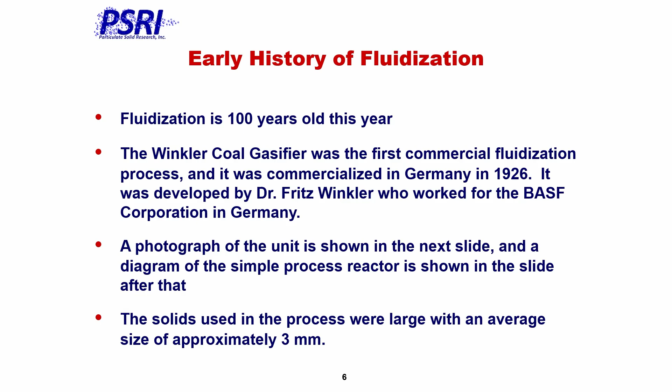The solids used in the process were large, with an average size of approximately 3 millimeters. And as we're going to see, even in the US and in Europe, people were using very large particles, Geldart group B and D, when they first looked at fluidized beds. It wasn't until we got to small particles that people really started to develop the FCC process.

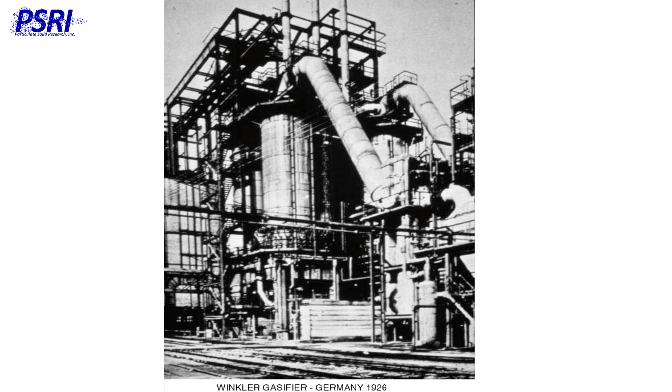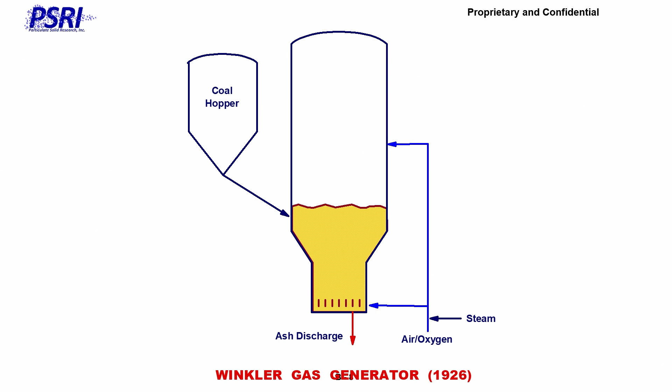Here's a picture of the Winkler gasifier. You see it was a going concern, a big unit here. And this is basically the gas generator, a diagram of what it has. They brought in the coal here. They really didn't have a proper distributor, it was more like a grate that they had here. They would bring in the oxygen and air and oxygen steam here as well. So it was a very simple device, but it was the first commercial fluidized bed.

As I said before, fluidization was being explored in both the US and Europe in the 1920s using the Geldart group B and D particles. I'll talk about Geldart groups B and D in a little bit, and most of you people already know about that. Research was conducted in the US, basically by the US Bureau of Mines in the 1920s, and also in Europe in the 1920s, especially with BASF, headed by Dr. Fritz Winkler.

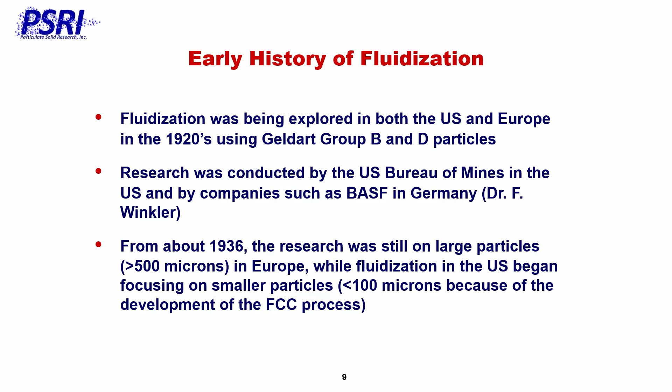From about 1936 until later, the research was still on large particles, greater than 500 microns, in Europe. Fluidization in the US at this time began focusing on smaller particles, less than 100 microns, basically because of the development of the FCC process. And it was sort of an accident, as we're going to see, why we went into the smaller particles. So the history of the development of fluidization basically parallels the development of the FCC process.

So it is the reason why we have this large fluidization community today. It's sort of the grandfather of all fluidization processes. So this process was important.

Whoops, I'm sorry. Let me go back here. I hope I go back.

This process was important in producing high-octane aviation gasoline and Buta-S rubber in World War II. The government was plowing all sorts of money into development of these processes. So it developed very quickly. It couldn't be done in the same time frame today, but anyway that's what they did. So there was a lot of money given to these companies and a lot of pressure put on to develop this process.

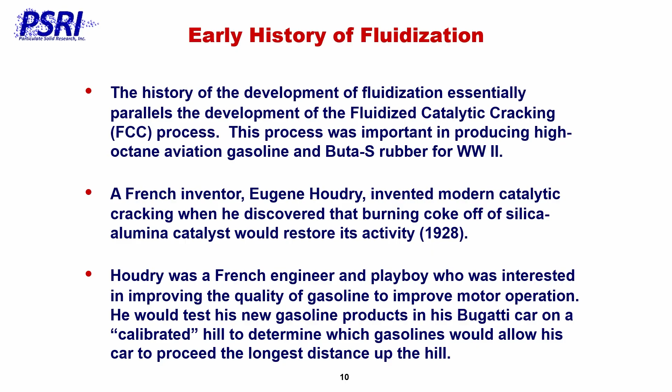Houdry was a French engineer and playboy, basically what in French they call a raconteur, something like that. He was really interested in improving the quality of gasoline to improve motor operation. So what he had was a Bugatti car, and he would test his new gasoline products in this car on a calibrated hill. The best gasoline products would get the car further up the hill and that sort of thing. Anyway, he was an interesting guy.

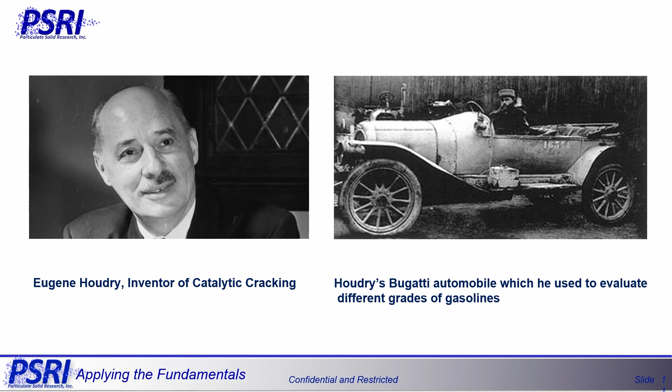So this is a picture of Houdry, and this is a picture of the car that he used to calibrate and test out the different grades of gasoline that he would produce.

So Houdry developed this process and had patents, and people were using this process to produce gasoline. Houdry's patents were adopted by Sun Oil Company and Socony Vacuum, which later became Mobil, to produce the first commercial catalytic cracking unit. It was a packed bed in 1936 with big particles, roughly about 3,000 microns or so. They weren't the 70 micron particles that you have today.

After a while, other oil companies had to pay a license fee to Houdry, and some of them felt that Houdry's licensing fees were excessive. So Standard Oil of New Jersey, called Jersey at that time, now Exxon, was a leader in forming an 8-company Catalyst Research Association to develop a catalytic cracking process outside of Houdry's patents.

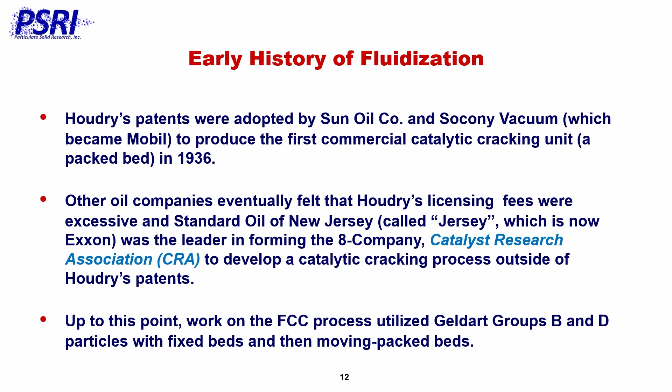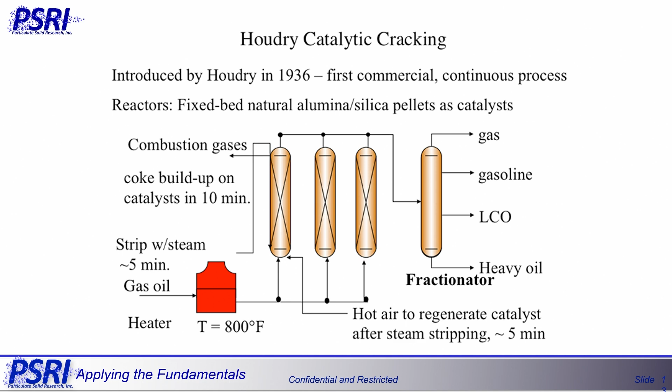Up to this point, work on the FCC process utilized Geldart groups B and D particles with fixed beds and moving packed beds. This is basically Houdry's process. He had 3 fixed beds, with different things going on in each particular bed. In one, he had hot air to regenerate the catalyst after steam stripping, and so on. So he had different parts of these fixed beds, and they would move the gases around in that particular type of approach.

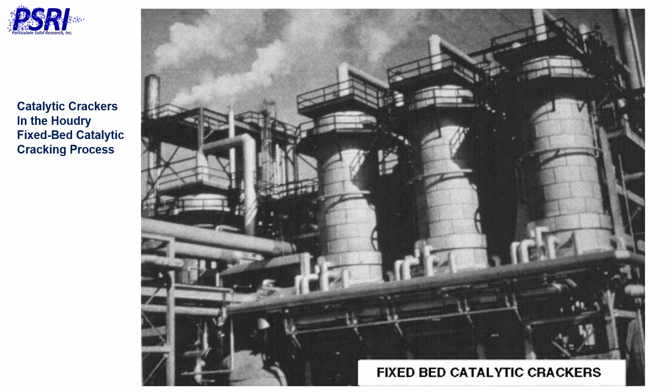So this is a picture of these 3 beds of the Houdry process, basically around 1936, 1937 or so. But in 1934, before the formation of the Catalyst Research Association, it was discovered accidentally at Imperial Oil...

...that a small Geldart Group A powdered catalyst could rapidly and catalytically crack oil. After some time, the CRA used this discovery to develop their cracking process using fine particles. So that's really why we started to use fine particles with FCC. At this time, the U.S. then began diverging from using large particles. However, large particle work on fluidization persisted in Europe for several more years.

So early FCC units using fine particles employed horizontal tubes or coils. It wasn't a vertical fluidized bed like we have today. And they were having a lot of trouble with these horizontal tubes and coils because of plugging of the reactor.

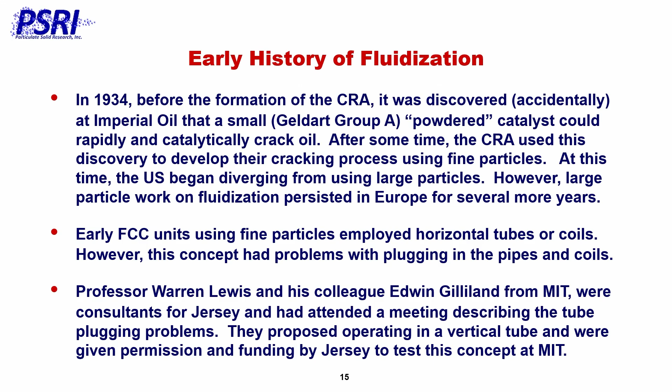So Professor Warren Lewis and his colleague Gilliland from MIT, very famous figures in the field of fluidization, were consultants for Jersey. They attended a meeting where they were talking about the plugging of the pipes and coils. They proposed operating in a vertical tube and were given permission and funding by Jersey to test this concept at MIT. The tests at MIT were very successful, and eventually this vertical fluidization concept was adopted by Jersey and the CRA.

Interestingly, Lewis and Gilliland said that they were not aware of the vertical fluidized bed used by Winkler in Germany. They may not have been, but Jersey certainly was.

Jersey said that they were aware of this Winkler work, but claimed that it didn't influence the development of their process, because the Winkler was a large particle process.

The first modern FCC process began operating in Baton Rouge, Louisiana, on May 25th, 1942, with the Jersey Exxon Model 1 unit. The original name of the process was Powdered Experimental Catalyst Louisiana, shortened to PECLA. The Jersey Exxon Model 2 was started in 1944.

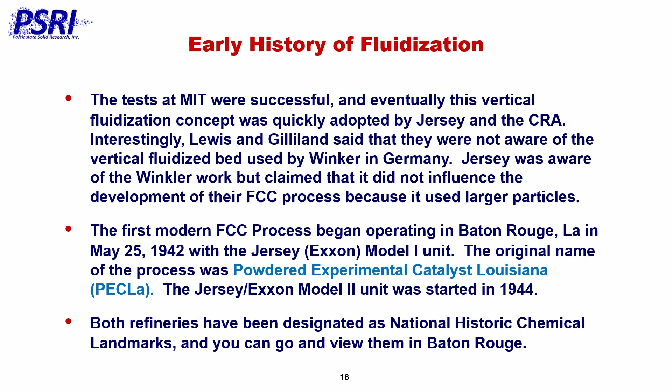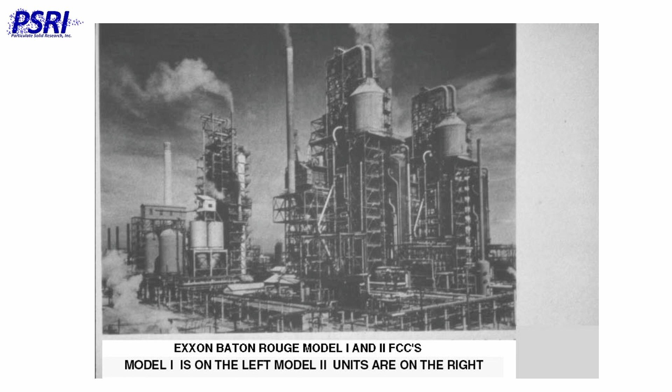Both refineries have been designated as National Historic Chemical Landmarks, and you can actually go see them in Baton Rouge. Here's a picture of the Exxon Baton Rouge Model 1, and the Model 2 FCCs are here on the right. You can actually go and see these units.

Because of these developments, FCC has been called the grandfather of the fluidization field, and it's rightly so, because almost all the work done early on in fluidization was done in association with the FCC.

It got this impetus from World War II, as I said before, to develop high-octane aviation gasoline and butylenes to develop Buna-S rubber and high-octane gasoline. So the development of the FCC process was really a very large factor in influencing the outcome of the war.

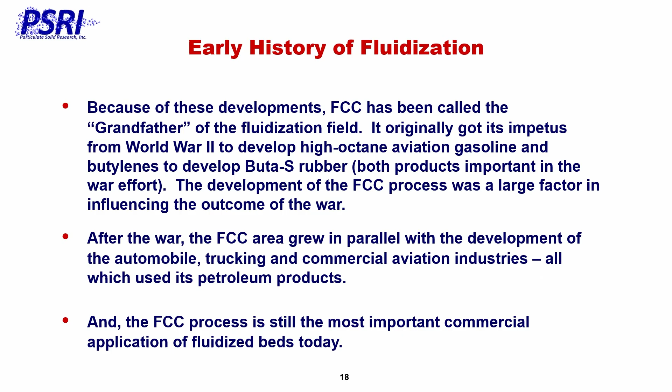After the war, the FCC area grew in parallel with the development of the automobile, trucking, and commercial aviation industries, all of which used its petroleum products. Even today, the FCC process is still the most important commercial application of fluidized beds.

After World War II, developments in fluidization proceeded very rapidly. Fluidized beds were used in the production of phthalic anhydride, acrylonitrile, the Fischer-Tropsch process, and were also extended to drying of materials. This happened in the late 40s and early 50s.

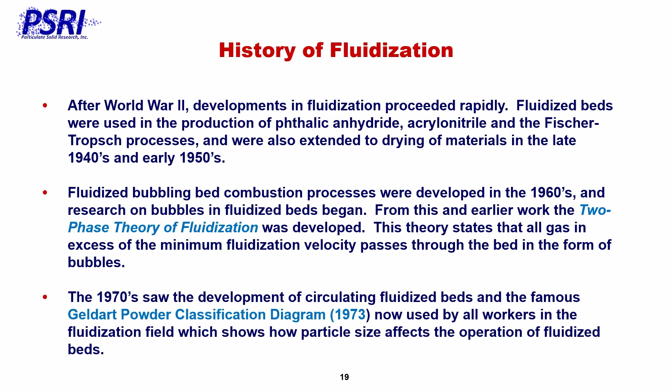The fluidized bed bubbling combustion processes were developed in the 60s. Then people said, well, we've got this fluidization concept, it has bubbles in it, maybe we should study bubbles. So they started to research bubbles and how they affected these fluidized beds.

From this and earlier work, the two-phase theory of fluidization was developed. This theory states that all gas in excess of the minimum fluidization velocity passes through the bed in the form of bubbles. So if you have a high velocity in your bed, almost all the gas is going through the bed as bubbles.

The 70s saw the development of circulating fluidized beds, which is basically what an FCC riser is, a circulating fluidized bed. Circulating fluidized bed combustors are the main proponents of this technology.

The famous Geldart powder classification diagram was developed in 1973, and it's now used by all workers in the fluidization field, showing how particle size affects the operation of fluidized beds. I'll show you on the next slide. It's the most famous paper in fluidization.

It was little known, however, that when Derek Geldart submitted his paper to be published, it was rejected the first time. I was a good friend of Derek, and he was a little miffed about this. He said it probably didn't have enough partial differential equations in the paper, because it was a very simple paper. But it basically revolutionized how people look at particles in the fluidization field.

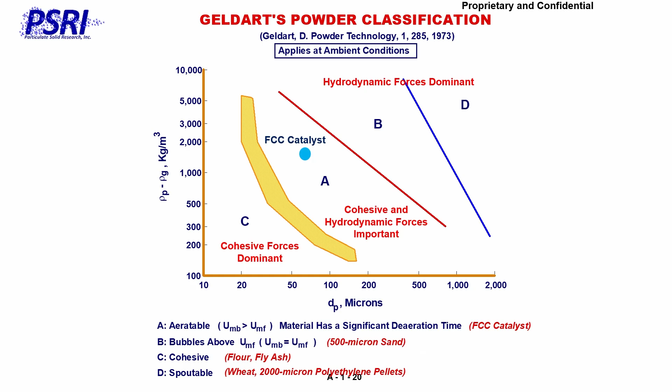Now, you guys are probably all too young to remember this, but the embargo of the Organization of Petroleum Exporting Countries, OPEC, against the U.S. in 1973 led to shortages of natural gas and petroleum. People who lived at this time will remember the rationing of gasoline and long lines of people waiting to fill their automobiles.

For instance, if your license plate ended in an even number, you could get gasoline on a Monday, and if it ended in an odd number, you could go get gasoline on Tuesday. That's how they did this sort of thing. Because of these shortages, the U.S. government said, I want to not be caught like this again—I want to be able to produce more energy.

So they increased funding for several coal gasification plants to produce syngas to mitigate these future oil shocks. These coal gasification processes were operating at very high pressure, say 1,000 psi-G or 70 bar, and high temperature, 1800 F or 1,000 degrees C. They didn't have much information on fluidization in this area, so the lack of information at high pressure and temperature led to significant research during this time.

Nearly all of these processes utilized Geldart Group B solids as well. And that's where I got my first baptism into fluidized beds, because of this particular area in the 70s when IGT, that I worked for at the time, was developing coal gasifiers.

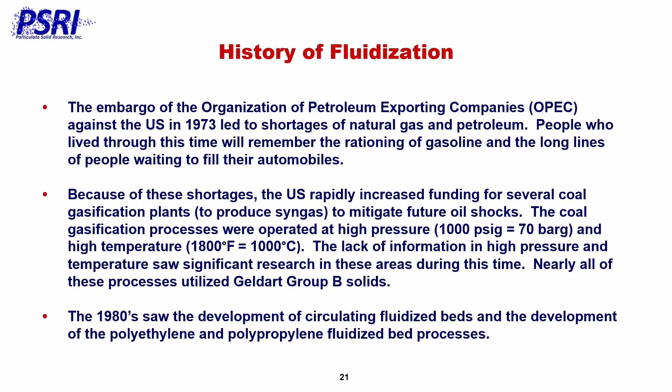The 80s saw the development of circulating fluidized beds and the development of polyethylene and polypropylene fluidization processes. In the 90s and the 2000s, and still to this day, there became an intense focus on process scale-up, system analysis, and the development of simulation tools, such as CPFD software is having today. This time also saw the early application of computational fluid dynamics and their models to fluidized beds, and the start of research into very fine cohesive particle fluidization.

This stuff is very hard to fluidize, cohesive particles, because of interparticle forces like flour. But it has such a high surface area to unit volume that people would really like to use this in a fluidized bed if they could, because it's going to be so reactive. So the improvement and focus on modeling fluidization and the work on fine cohesive particles are areas that will be important still in the future, and I'll talk a little more about that. The other major change over this time was the rapid rise of China in the fluidization field.

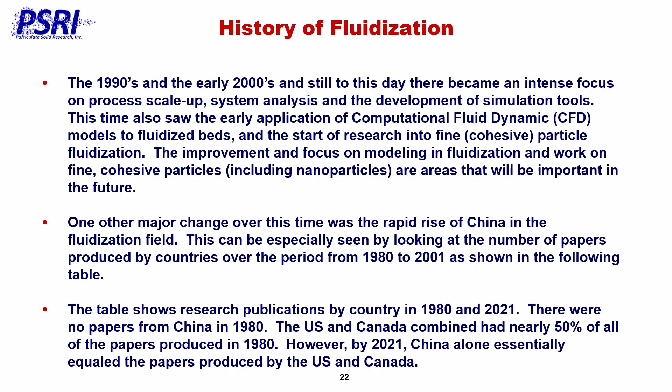This can be seen by looking at the number of papers produced by countries over the period from 1980 to 2021, shown in the following table. There were no papers from China in the top 10 in 1980, but by 2021 it was the leading country producing fluidization papers.

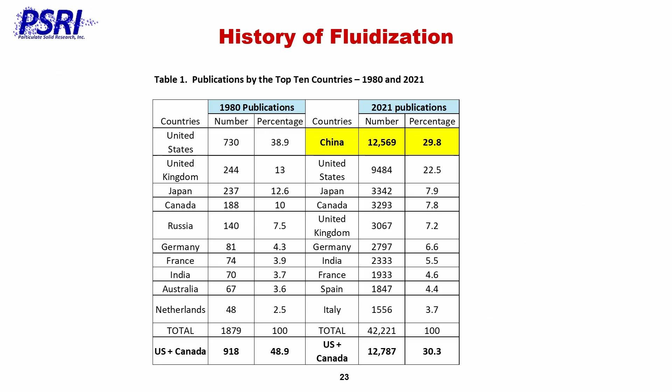In 1980, the United States had the largest percentage of papers in fluidization, and if you add US and Canada, it was about 50%. Now in 2021, China had the largest percentage of publications at about 30%, roughly equal to the sum of US and Canada. So in that period, China really took over the fluidization field, and the number of people working in it even today is dominated by China.

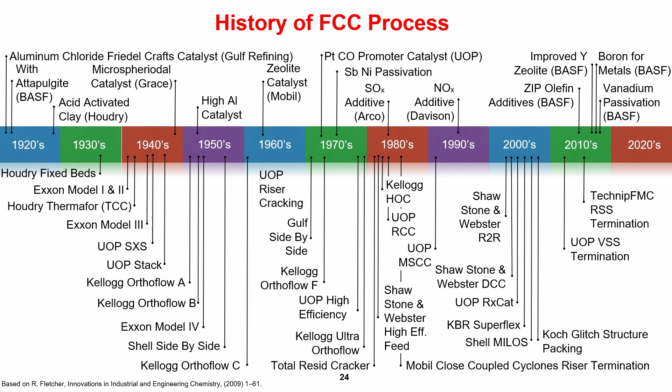This is just a plot for people who want to look at it, a history of the FCC process. We started with the Houdry fixed beds, then the Exxon Model 1 and 2. You can see a lot of things that were developed like UOP riser cracking, et cetera. This is a slide to look at significant developments in the FCC field.

I'd like to talk now about regimes in fluidization. There are different regimes depending on the velocity in your fluidized bed. I've done this for a Group A material. First you have a packed bed, where you don't have enough drag force to support all the particles and cause fluidization. Then for a Group A material, just barely above fluidization, you have the particulate regime where it's fluidized but you have no bubbles.

Then you start to form bubbles into the bed, a typical bubbling bed. In a research lab, if these bubbles get to be about half the size of the column, you have what's called slugging, with severe fluctuations in the bed, something you want to stay away from. Fortunately, in commercial systems the units are so large you don't have to worry about slugging. Maybe in pharmaceuticals with smaller diameter beds, but with big beds you won't get slugging because the bubbles don't get to be half the size of, say, a 50-foot diameter vessel.

Once you get to bubbling beds and increase the gas velocity, you get into a turbulent bed. Turbulent beds don't really have any stable bubbles, but they have voids that break very quickly, so you get high rates of heat and mass transfer. That's really where almost all FCC regenerators lie.

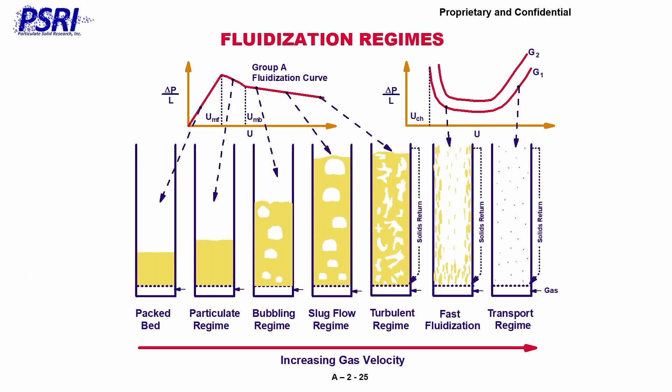Between what we call a choking velocity, which separates the dilute phase from the dense phase, and this point, this is called the fast fluidization regime. That's where the FCC risers operate—it's the densest part of the dilute phase pneumatic conveying regime. So for many years people looked at these regimes, and we really know what happens now.

There was a huge argument in the 70s and 80s about where the fast fluidization regime was. Some people said it's here, some people said it's here. Now we know basically it's right here.

Fluidized beds have been spectacularly successful as devices to produce industrial products over the last 100 years, especially in the chemical and petrochemical industries. The characteristic advantages of fluidized beds that make them such widely accepted and highly efficient devices are listed below.

First of all, they have excellent heat and mass transfer. For heat transfer, it's an order of magnitude, 8 to 10 times what the heat transfer would be in a packed bed.

Also, you have precise temperature control. The rapid solids mixing in these beds results in nearly isothermal conditions, with temperatures throughout the bed within 2 to 5 degrees C. That's one of the best diagnostic tools you have in your fluidized bed—looking at the temperature distribution across the bed. If it exceeds more than 10 degrees C, you should start to worry about whether that bed is operating correctly. It also has a small footprint.

Due to the excellent gas-solids contacting and mixing, fluid beds require smaller reactor volumes to achieve the same throughputs as other technologies. And then it has fuel and material flexibility—fluid beds can accommodate a wide range of particle sizes and use combinations of different materials.

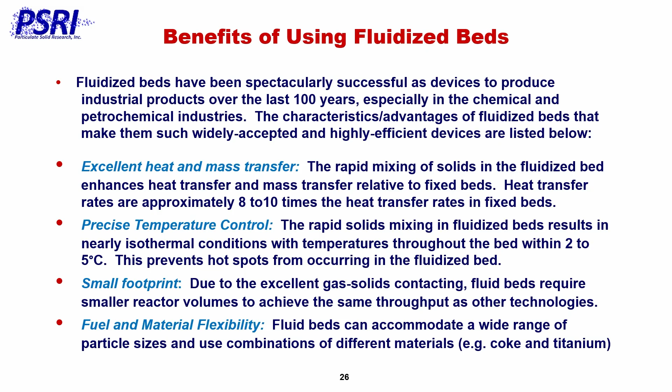For a chlorinator, where they have coke and titanium ore, the titanium ore is 150 microns, the coke is 1,000 microns, but you have to fluidize both at the same time, and they do it very successfully at about 800 to 1,000 degrees C. People are very creative, and they've been able to apply this field to all sorts of different types of processing.

Today the fluidization field is at a stage of knowledge development that is significantly greater than it was even 20 years ago. Now you have diagnostic techniques that have been developed that allow the determination of gas and solids mixing. You have mathematical models that are at a helpful stage of development now, and I'll say a little bit more about that.

The scale-up of fluidized beds is still an issue, taking time and money, but there's less variability in scaling up and more understanding of how to proceed with it now than there were 20 years ago.

The knowledge of fluidization regimes and how each regime should be used with each type of reaction and particle size is now pretty well understood. But what is not known definitively is how to predict interparticle forces and behavior of cohesive particles. That's extremely, extremely difficult. This is an area that will be studied more extensively in the future.

Probably if I were a young engineer going into this field, I would gravitate to that area because there's going to be a lot of work in this area.

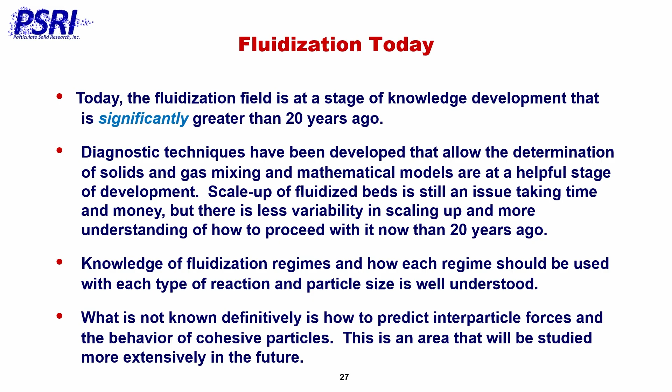Today there are extensive techniques that have been developed and perfected over the years that can be used to evaluate what is occurring in the laboratory, and some can be applied to hot fluidized beds. I'm going to list just a few of these things. First of all, there are optical probes, and they've been around for quite a while.

These use optical fibers to transmit laser light into the bed and then detect backscatter. The probes can determine bubble properties and particle concentration in the bed.

Then you have gas tracers, generally using helium, or maybe CO2, or other gases like sulfur hexafluoride. Using thermal conductivity detectors, you can determine the degree of gas backmixing and the amount and direction of gas flow.

Then you have fluorescent-coated solid tracer probes. The motion and concentration of solids dyed with fluorescent coating can be determined with probes, so you can determine mixing and how fast the mixing occurs in the bed.

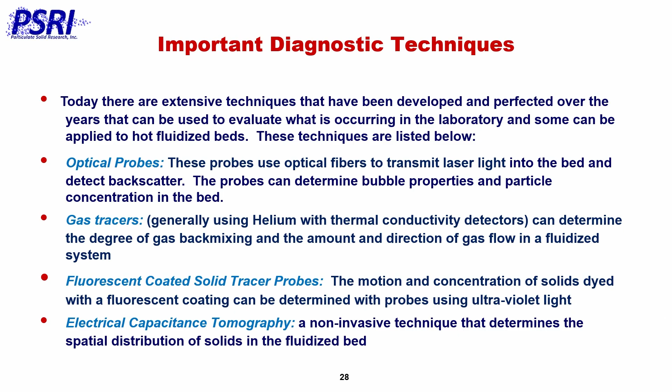And then you have electrical capacitance tomography, a non-invasive technique that determines the spatial distribution of solids in the bed.

And then there's high-frequency differential pressure probes, which we use a lot at PSRI. The fluidized bed behavior can be related to measuring the standard deviation of bed differential pressure drop fluctuations. The normal frequency of a fluidized bed is somewhere between 2 to 5 hertz, so you need something an order of magnitude greater than this—say 25, 50, or about 100 hertz—and you can see what happens in the bed, which gives you a lot of information.

Then you can have an extraction probe, a tube placed in the bed, a dilute phase line, to measure the mass flux distribution across the line because it's a movable probe. And then positron emission particle tracking, which is called PEPT.

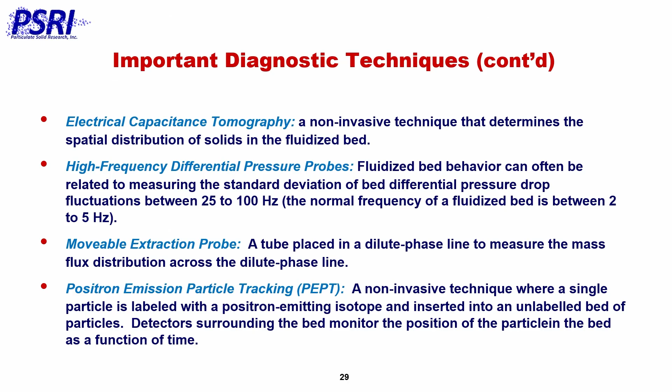It's really a very powerful tool, but it can't be used in large units. It's a non-invasive technique where a single particle is labeled with a positron emitting isotope, inserted into an unlabeled bed of particles, and detectors surrounding the bed monitor the position of the particle as a function of time. So you operate this over several minutes, and you can see where the particles have gone, how it mixes, and that sort of thing in the bed.

So there are hundreds of fluidized bed processes that exist today. However, there are several that are deemed important either due to their size or the relative importance of the area, so I'm going to talk about some of these. It's certainly not an exhaustive or all-inclusive list, but FCC, okay?

This process is still the oldest and most important application of beds today. This process converts crude oil into gasoline, diesel fuel, jet fuel, LPG, propylene, etc. Then there's the synthesis of polyethylene and polypropylene.

The fluidized bed for this particular process allows really effective heat removal and precise temperature control to prevent the melting of the resin. So they operate within about 5 degrees C of the melting point, something like that.

Then there's fluidized bed combustion, the CFBC, where you have a circulating bed that burns, say, coal, biomass, whatever fuels, in a suspended dilute phase mixture of ash and limestone for power generation. It captures sulfur and reduces NOx.

Very large units. For instance, these big units, a lot of them are in Poland and China. They're rectangular in nature, and the long length of the bed would be longer than the length of this room. The width would be maybe half to two-thirds the length of this room, and they're 200 feet tall.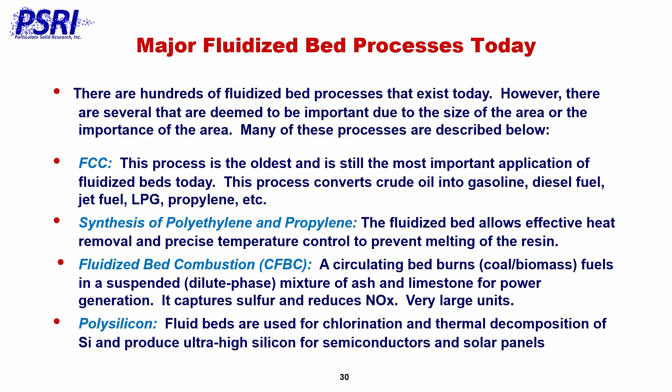Then you have polysilicon, and fluid beds are used for chlorination and thermal decomposition of silicon, producing ultra-high purity silicon for semiconductors and solar panels.

Then you have biomass and waste gasification. Fluid beds are used to convert municipal solid waste and biomass to syngas. Roasting of sulfide ores, where you take copper, gold, and zinc sulfides, roasted to extract metal oxide, producing SO2, mainly for sulfuric acid production.

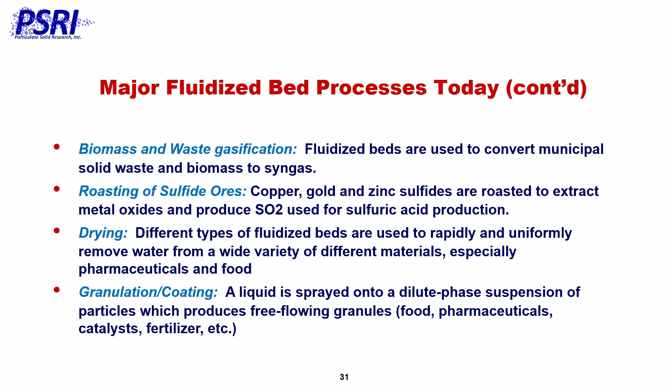And then drying—you have all sorts of fluidized beds, different types for different materials, used to rapidly and uniformly remove water from a wide variety of materials, especially in pharmaceuticals and food. Then you have granulation and coating, where a liquid is sprayed onto a dilute phase suspension of particles, producing free-flowing granules for food, pharmaceuticals, catalysts, fertilizer, etc.

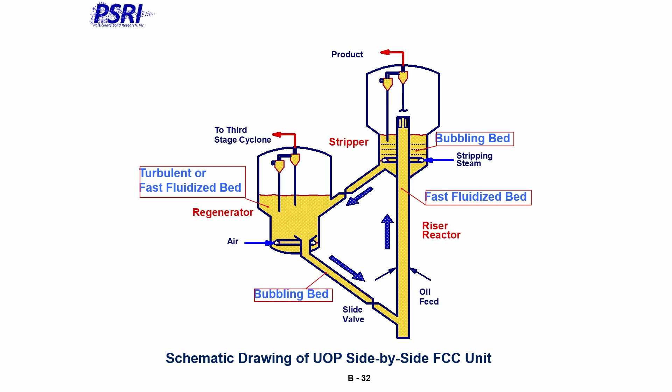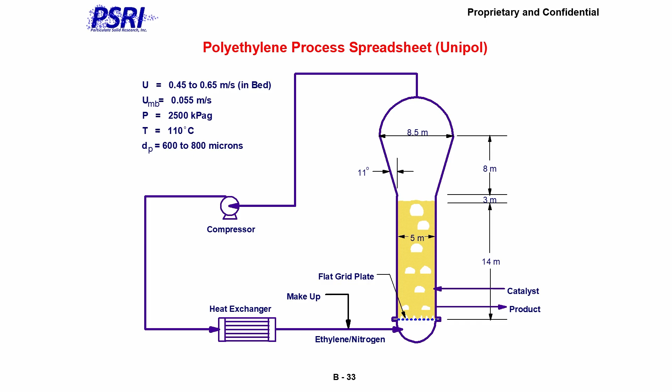And this one has no cyclones. It's one of the processes that doesn't have cyclones. They take the fines, and they've learned how to break these fines, to reduce them with an expanded freeboard, but then take them through a compressor and a heat exchanger before you go back into the bed. So you bring in a catalyst, and then on each catalyst, like an onion skin, you grow polyethylene.

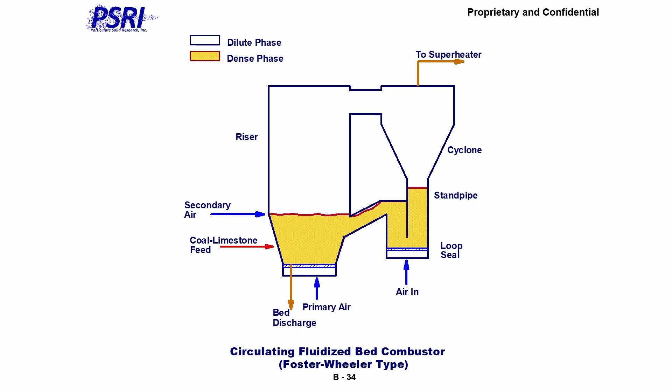Now, this is one of these circulating fluidized bed combustors that I talked about being so large. It's a rectangular device where you put in air and you have the circulating bed. This operates in dilute phase. You go into this very large diameter cyclone that I talked about. Almost all of them have something called a loop seal to take the solids right back into the bed. So the unconverted coal and ash will come back here and you circulate everything around.

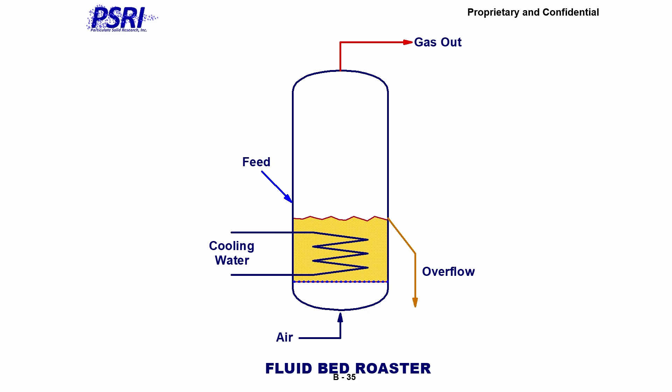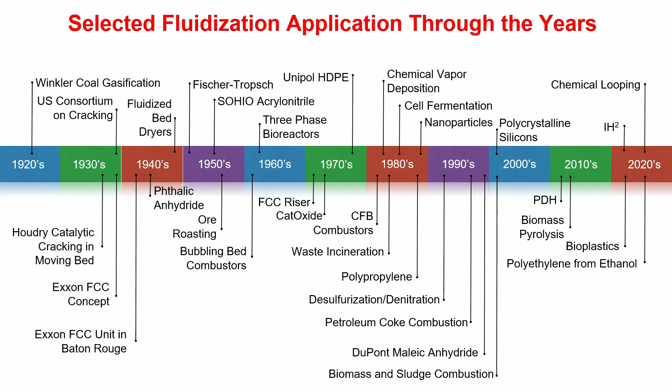Okay, and here's selected fluidization applications through the years. So you can look at this slide and see basically where everything started. For instance, the Houdry catalytic cracking in a moving bed occurred right here. There's the Exxon FCC concept. You had fluidized bed dryers, etc. So you can see over the years where these fluidized beds were developed and where they came into prominence.

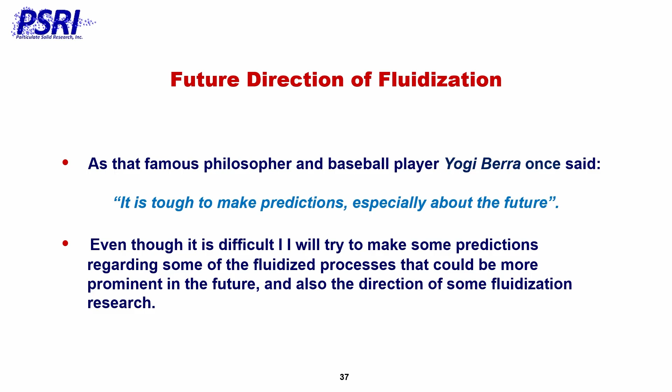Okay, now I'd like to talk a little bit about the future direction. So I go back to this famous philosopher and baseball player, Yogi Berra, and some of you know who he is. He said, it's tough to make predictions, especially about the future. So even though it's difficult, I'm going to try to make some predictions here regarding some of the fluidized bed processes that could be more prominent in the future and the direction of some fluidization research.

Okay, so today, the fossil fuel processes that have been the backbone of the fluidization field are slowly declining in importance, right? Everybody wants green technology. So they go to sustainable and green technologies, but some processes that are expected to become more prominent are listed below. First of all, there's calcium looping, which is a type of chemical looping.

This is a regenerative, cyclic, high-temperature process that uses inexpensive limestone to capture CO2 from flue gases in the stack, right out of a process or a company. So it produces a nearly pure stream of CO2, which you can use industrially for enhanced oil recovery or whatever you want, or you can store it, whatever you would like to do, okay?

Then there's methane pyrolysis. We're getting a lot of, the last several years, people have come to PSRI and talked to us about different variations on the theme of methane pyrolysis. Mainly it means how to heat the bed differently. It's also called methane cracking, and methane is broken down into a clean hydrogen plus a valuable carbon product. So this process does not release CO2 and is a highly efficient method of producing hydrogen as well. And some people actually want to produce the carbon because it's more valuable than the hydrogen.

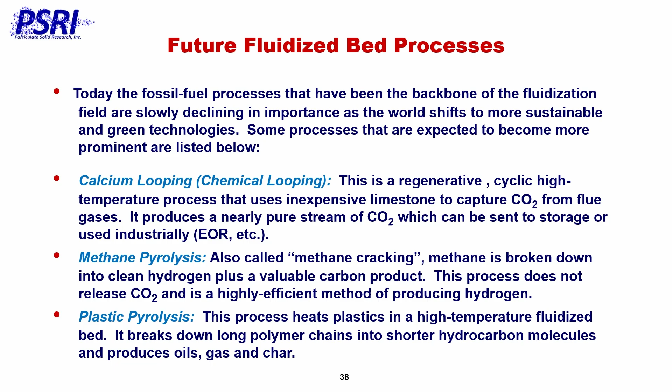Then there's plastic pyrolysis. This process heats plastics in a high-temperature fluidized bed. It breaks down long polymer chains into shorter hydrocarbon molecules and produces oil, gases, and char.

Okay, so this is one of the circulating fluidized bed calcium looping systems, where you take the flue gas right from the stack, go through what is called a carbonator, and then this would basically output a CO2-free gas. So you take the solids from here and take them over to what's called the calciner. In this particular reactor, you might have CaO plus CO2 goes to CaCO3. You take the calcium carbonate, and then CaCO3 goes basically to CaO plus CO2, and you get an enhanced CO2 stream here that you have.

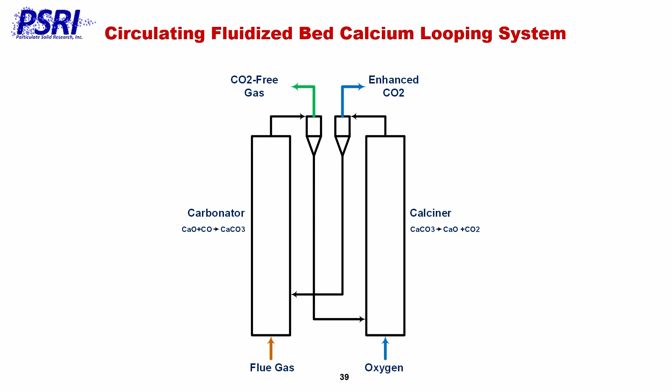Okay, now in the near future, more experimental work is going to be directed towards cohesive solids, materials smaller than 30 microns on average size.

They're very difficult to fluidize and transport, but because of the high surface area per unit volume, people want to use these materials. So PSRI has already seen much more interest in these materials in the last few years. We've developed new techniques and equipment to allow fluidization of these materials, and we've made great inroads in how to handle and fluidize them. But still, we need to go much further.

The interparticle forces which cause cohesion can cause small individual particles to agglomerate together instead of behaving like individual particles. These forces are van der Waals forces, electrostatic forces, capillary forces, etc. They can also cause material larger than group C, say group A material—if you put some group A material into your freeboard, some of it can agglomerate as well. So it's not just group C material you have to worry about with agglomeration and clumping. This is apparent in risers as well as in the freeboard of some group A particle beds.

However, the interparticle forces which cause cohesion are different with each particle. We had a zinc material that we found extremely difficult to fluidize, where some other group C materials were relatively easy. So we don't know why this is, or how to predict these interparticle forces, but they're definitely different for each material. It's expected there will be a large increase in work in this area in the coming years.

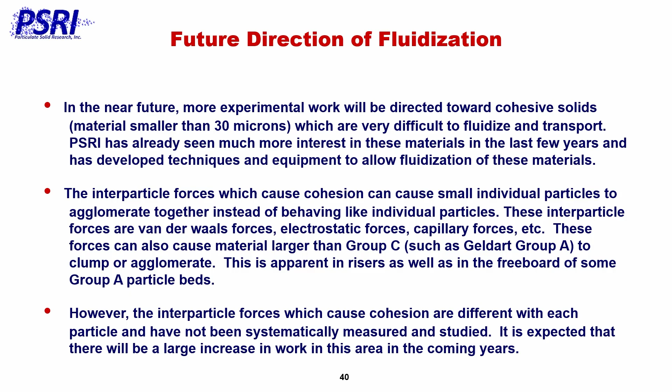This slide shows what can happen. Basically, you really can't consider a riser, at least with group A material, as individual particles going through the riser. What happens is you get these assemblages of particles going up the riser. Even in a fluidized bed, if material is entrained from the bed, you won't have individual particles if you're in group A—maybe group B and group D, yes, but for group A materials you're going to get this same thing happening. There are many papers on this. This is a fluid bed with agglomerated particles in the freeboard.

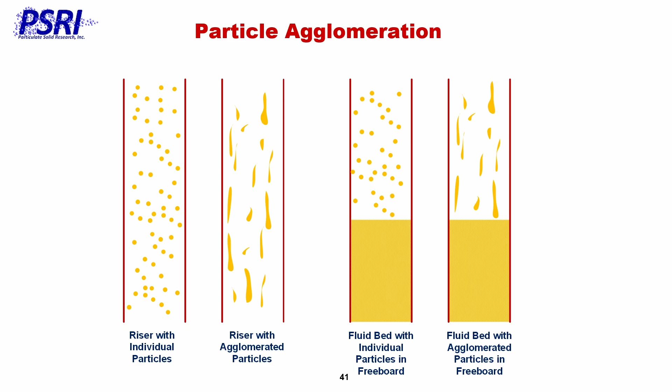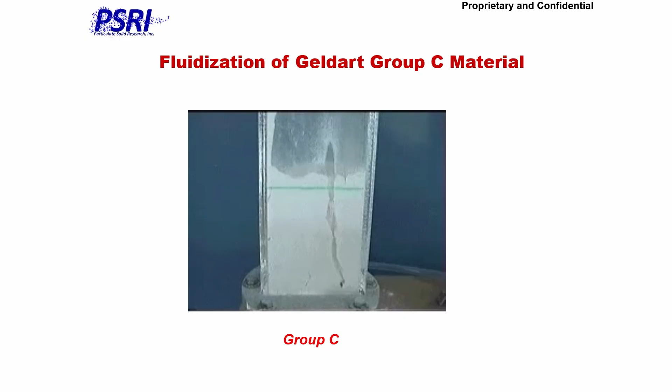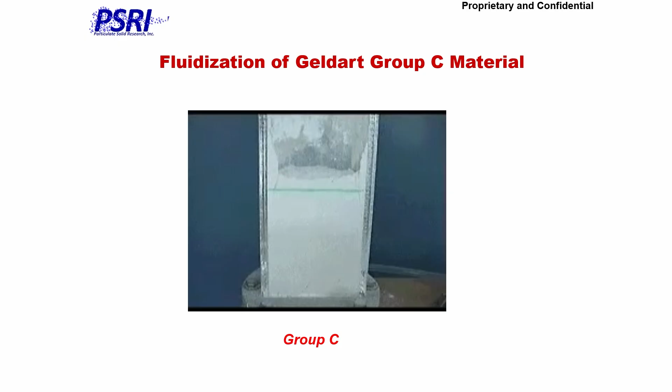Now I want to show you some of what happens with group C material and why it's so difficult to work with. We just added gas to this bed of material—it's a semicircular column here. Then it breaks up and starts to fluidize, but then it goes through what is called a rat hole: the gas goes through this rat hole instead of fluidizing. It'll maybe revert to fluidization for a few seconds, then revert back to rat holing where the gas just bypasses the bed. This is obviously not something you want to happen if you're trying to fluidize this material, but there are ways to actually make this material fluidize better.

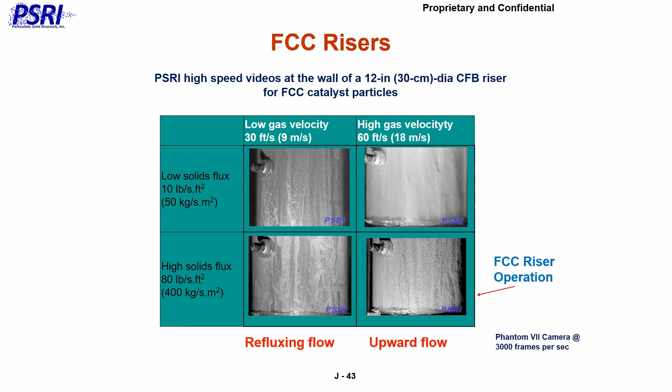Everything is becoming more complex, but people are very creative and are learning how to handle these sorts of things. It's also been readily apparent to people in the fluidization field that the number of papers on mathematical modeling has increased tremendously over the past 35 years. Because of this increase in modeling, PSRI issued three challenge problems to modelers, to obtain a sense of how accurate the models were and if they were improving. Data was produced in the PSRI test units, and this information—the size of the units, the velocity, solids flow rates, etc.—was given to the modelers, not the results. We asked them to model, say, the mass flux distribution across the riser, to see if they could predict those values.

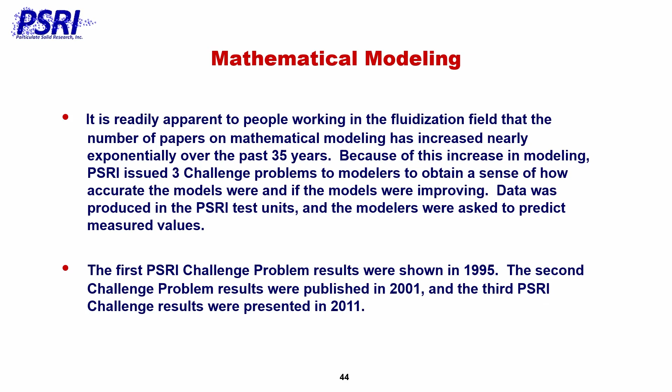The first PSRI challenge problem results were shown in 1995, the second challenge problem results were published in 2001, and the third was in 2011. So it's about time for another one, I think.

In challenge problem 1 in 1995, the modelers were asked to predict the measured radial distribution of solids mass flux in an 8-inch, 20-centimeter diameter riser as a function of gas velocity and overall solids flux. The conclusion of the exercise was that the models were not sophisticated enough to be used to predict the hydrodynamics in a CFB.

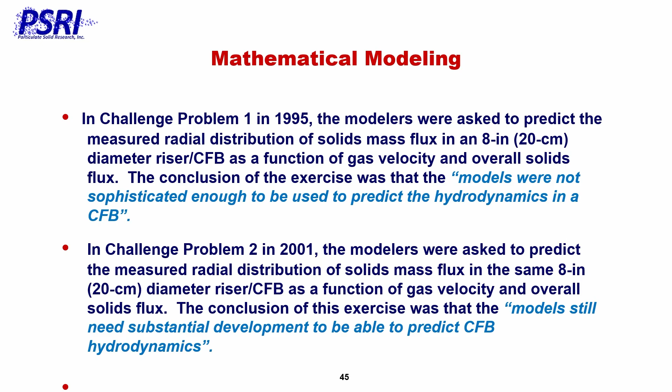In challenge problem 2 in 2001, the modelers were asked to predict again the measured radial distribution of solids mass flux in the same 8-inch or 20-centimeter diameter riser as a function of gas velocity and overall solids flux. The conclusion of this exercise was that even though there was a demonstrated improvement, the model still needs substantial development to be able to predict CFB hydrodynamics.

The last challenge problem in 2011 was slightly different. Modelers were asked to predict the radial distribution of solids in a 12-inch, 0.3-meter diameter riser from NETL, the National Energy Technology Laboratory riser, and also predict the density profiles in a 3-foot diameter bubbling fluidized bed at PSRI using FCC catalyst operating at different gas velocities and with different fines levels. In some cases, we knew that the bed was operating with something called gas bypassing, and I'll talk to you about that shortly.

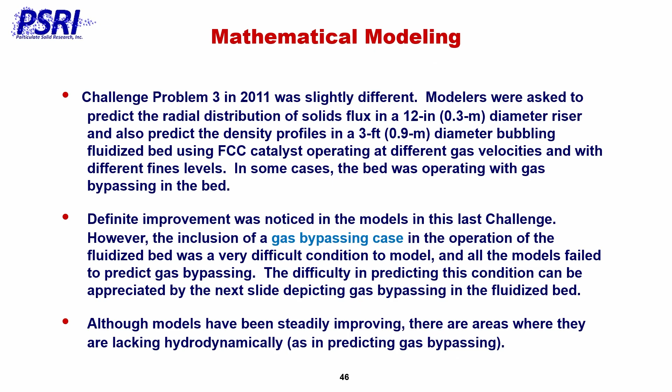Definite improvement was noticed in the models in this last challenge—a big improvement. However, the inclusion of the gas bypassing case in the operation of the bed was a very difficult condition to model, and the models failed to predict gas bypassing, in my opinion. The difficulty in predicting this condition can be appreciated on the next slide, where I'll show you what gas bypassing looks like. So although the models have been steadily improving, and have improved massively since 2011, there are areas where they are still lacking hydrodynamically, such as predicting gas bypassing.

This is a fluidized bed of FCC catalyst that is a 4-foot deep bed right here, and you can see everything is fluidized extremely well. When we go up to an 8-foot deep bed, however, you see gas bypassing up here, like a stream of gas. And when we go to a 12-foot bed, it's even more prominent—you can see the gas bypassing here.

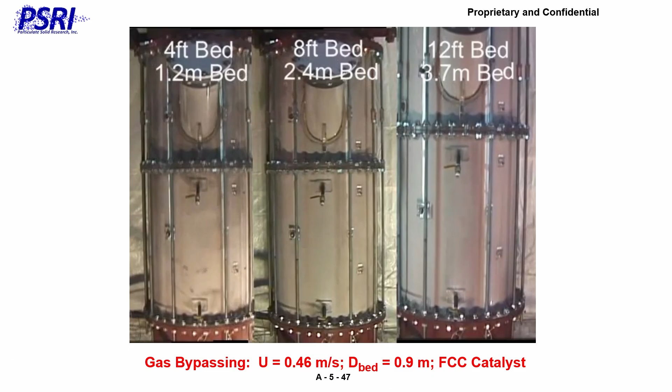You don't get good fluidization if you get into these conditions where you have a deep enough bed, or whatever conditions give you gas bypassing. And that's extremely difficult to model—I think it's extremely difficult to model.

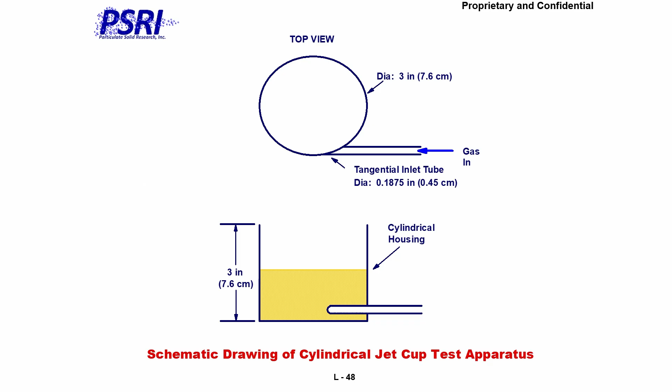The other thing that's important at PSRI, which has been a success of modeling, is that we have what's called a jet cup, which we use to measure particle attrition. We had a cylindrical jet cup, and from the top view, there's a tangential inlet tube that comes in. We fill it up with about 100 grams of material, operate it for a period of time, and look at the particle size distribution we put in versus what happens afterward, so we can see how the fines concentration increases or the particle size distribution changes.

We were using this jet cup and got some material from attrition in a fluidized bed. We wanted to use the jet cup to predict what was happening there because it's much easier to operate the jet cup than the big fluidized bed. So we used this jet cup, and the data were all over the place. So what's going on here?

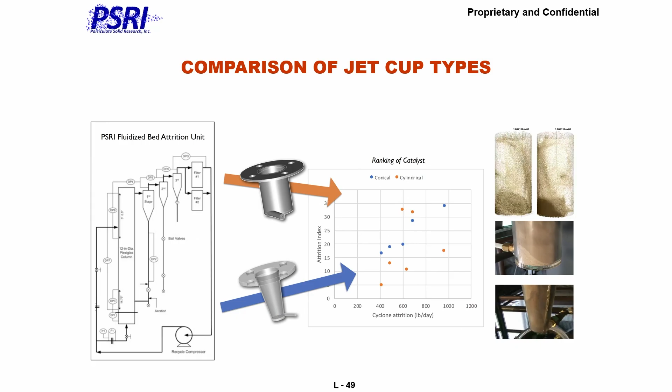So we started to model. We used the CPFD code and applied it to this jet cup to try to figure out what was happening. When we used the code, it said one of the problems you have is a stagnant region of material in this particular jet cup, and that's one of the reasons you're not getting the data you wanted.

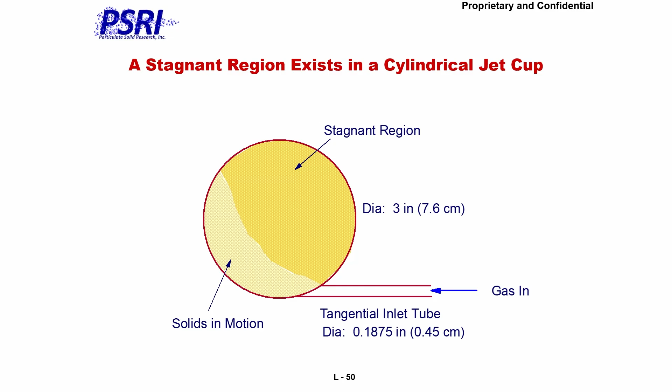So we called them back and said, your code isn't working—it says we have stagnant material in the jet cup. Okay, so what we did was look at this... I'll see if I have it here.

This is what the code predicted, that you would have stagnant material here in the jet cup. So he said, well, we'll just make a plexiglass column, and then we'll look at it and see if it occurs or not. Lo and behold, we had stagnant material in here. So the CPFD software code correctly predicted exactly what was happening in the system, that we did have stagnant material.

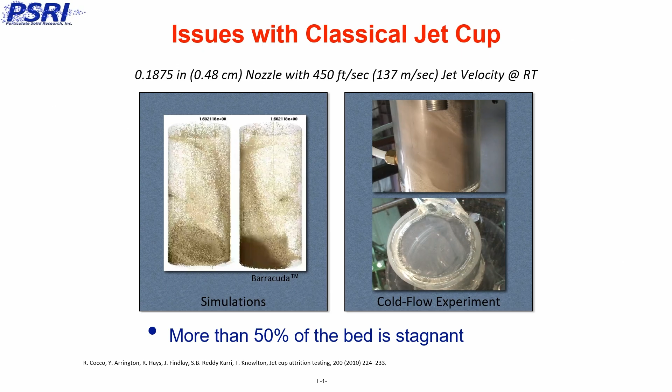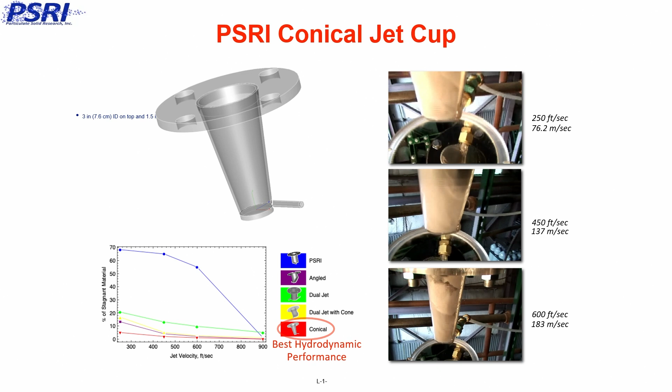So the way we solved that problem was to use a conical jet cup like this. When we have a conical jet cup, basically 99% of the material is in motion when we do our tests. So that was a big success, and it really helped us out a lot when we used the modeling there. I'm going to go to the next slide, which shows more dimensions of this conical jet cup that we developed. But it was basically because of the CPFD software modeling, which allowed us to get into a device which was successful in predicting attrition.

So there are two areas where modeling can really make a difference in the fluidization area in the future, in my opinion. One is decreasing the time to scale up processes, and the other is troubleshooting existing processes using especially Geldart A, the larger group B and D particles. Scale-up assistance and troubleshooting with models are being utilized now, but demonstrating improvement in the accuracy of the models would engender much more confidence in using them.

For instance, it might help if the models could predict gas bypassing. It would also help if they could predict what is happening in the Group A standpipes, which is a very difficult thing to do. Lauren talked about that in the last couple of days.

So even now, when not fully developed, modeling is a valuable tool to use in assisting in scale-up and troubleshooting. CPFD software has been remarkably successful in modeling large fluidized beds such as FCC regenerators and predicting results which are helpful to operators, like if you would change some of the equipment that you have in the bed, how would that affect the operation of the bed?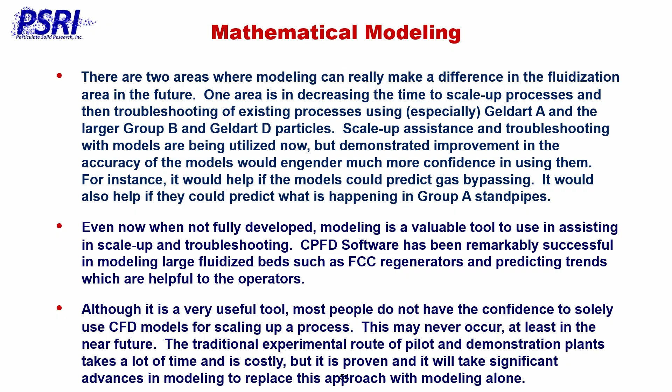So although it is a very useful tool, most people do not have the confidence to solely use CFD models for scaling up a process. This may never occur, at least in the near future. The traditional experimental route of pilot and demonstration plants takes a lot of time and is costly, but it is proven, and it will take significant advances in modeling to replace this approach with modeling alone. You have to get the confidence to use it. But it would be wonderful if that happened, and you're making inroads on it.

So the capability of models will continue to improve as computers, or GPUs, become faster and model development continues. Fluidized beds contain trillions of particles, perhaps even a quadrillion, which is 10 to the 15 particles. And the capability to apply models to individual particles, to determine particle-to-particle interactions and determine if they will form agglomerates, etc., appears to be a significant distance in the future.

With CFD and DEM coupling, perhaps as many as 10 to the 7th or 10 to the 8th particles can be used today. I like the way CPFD software does it with the multiphase particle in cell approach, because then you can estimate and get some realistic things to apply to these fluidized beds. But for modeling to achieve the ability to take on a greater role in scale-up, as well as to be able to predict the hydrodynamics in beds with different particle sizes, especially group A and group C, I think that's in the future.

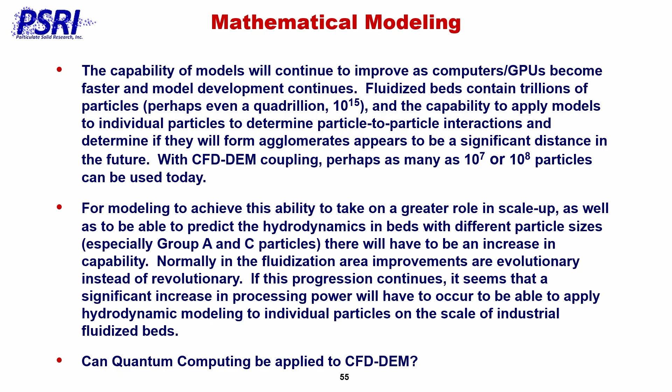So Peter and Sam and the rest of you may want to address that. Maybe I'm wrong. The other question I have is, can quantum computing be applied to CFD? I have no idea. But they're saying that there's a quantum leap in the capability of using models and being able to process these sort of things.